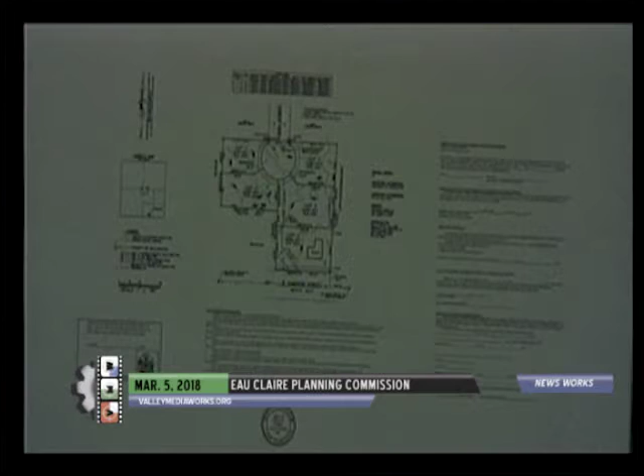The cul-de-sac bulb is off the 19th Street Addition. All lots do meet R1 district standards, which is single-family. Ryan, can you make the map a little bigger? Oh, sorry. There we go, thank you.

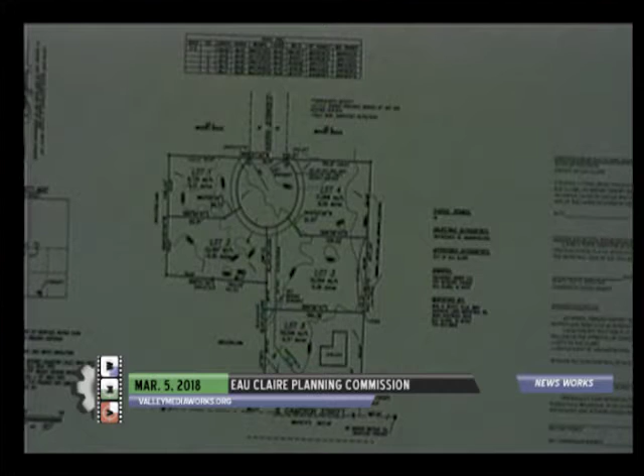Utility easements have been sent to Xcel Energy, AT&T, and Charter TV, and they must be shown on the final plat. Attached in your report is the engineering report. Staff would recommend approval of the preliminary plat for 19th Street Addition with two conditions: on the final plat, they need to indicate all the utility easements and compliance with the recommendations in the engineering report. I would be happy to answer any questions.

Are there any questions for Ryan? I don't see any at this point. Is the applicant here? Would they like to come forward? I don't see the applicant. This is a public hearing. Is there anyone else who'd like to speak to this issue? Seeing none, we'll close the public hearing, and I'd be looking for a motion.

I move approval with staff recommendations. Second. We have a motion and a second. Any discussion? Seeing none, we'll call the question. All those in favor? Aye. Any opposed? Motion carries. Second item on the agenda.

That might be a record, 2 minutes. For approval: site plan, Azura two 20-unit assisted living memory care facility, and a CSM for 3 lots.

This project got the rezoning and the general development plan approved last year. It's on Bullis Farm Road, located about here. With this project too, you are approving the certified survey map, which creates 3 lots: a common access drive, lot 1 with a building on it, lot 2 with a building on it, and a future phase for additional building.

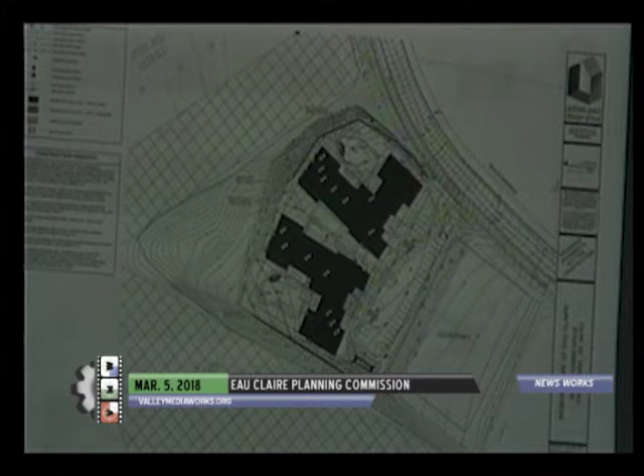Here is the site plan showing the two 20-unit buildings with shared parking. Here's the elevation showing the 1-story buildings. And then also the landscape plan.

Again, this facility is two 20-unit assisted living memory care facilities, with approval of a site CSM for the project off of Bullis Farm Road. Attached in your packet is the site plan, building elevations, CSM, and narrative for the project.

The site plan does create 2 20-unit facilities, which is consistent with the general development plan approved by council last year with the rezoning. The CSM does create 3 lots. City code does require all lots have frontage and access to a public street. Lot 2 of this proposed CSM does not have frontage, and thus the Plan Commission must approve the certified survey map.

The development does propose 1 single access drive to Bullis Farm Road. With the certified survey map, it does have a 66-foot wide access, parking, and utility easement. Lot 3, right here, will have to have a final site plan approved by the Plan Commission at a later date.

The site plan shows a 32-stall parking lot in front of the buildings. Typically, the residents at this facility do not drive. The required parking for this facility is based on the number of employees and visitors' needs. With the narrative, the applicant states there will be 17 total employees servicing both buildings, thus leaving 15 stalls for customers, visitors, or deliveries.

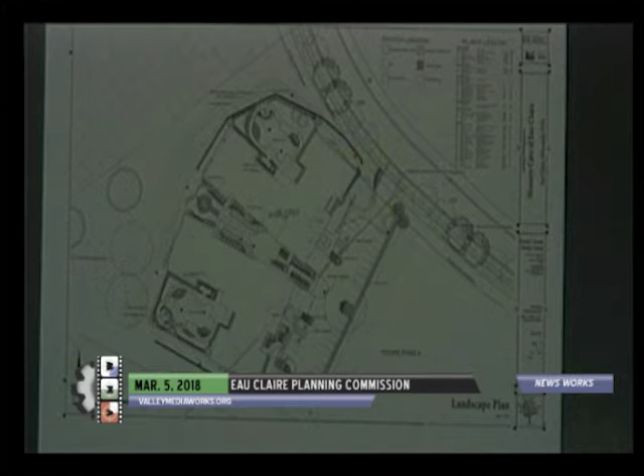In your packet is the engineering report. If the Plan Commission does find this site plan consistent with the general development plan, it should approve it with some conditions: providing a pedestrian link to Bullis Farm Road, city surveyor review of the CSM, and with Plan Commission approval of the site plan, also approving the 3-lot CSM, with Lot 2 having access, parking, and utility easements. City engineer approval of grading and drainage, and establishing a maintenance agreement for the stormwater facilities. I'd be happy to answer any questions.

Are there any questions for Ryan?

For Lot 3, which we don't have a site plan for, I'm assuming they would have to add additional parking. Correct, depending on the parking need of that facility. Okay, because that unit is supposed to be a larger number of units, right? So it would have a greater parking requirement. That is correct.

Okay, thank you. Any other questions for Ryan? I don't see any, thank you. Is the applicant here?

Good evening. My name is Matt Lyons, 1233 North Mayfair Road, Milwaukee, Wisconsin. I'm here to answer any questions. I don't have a prepared statement.

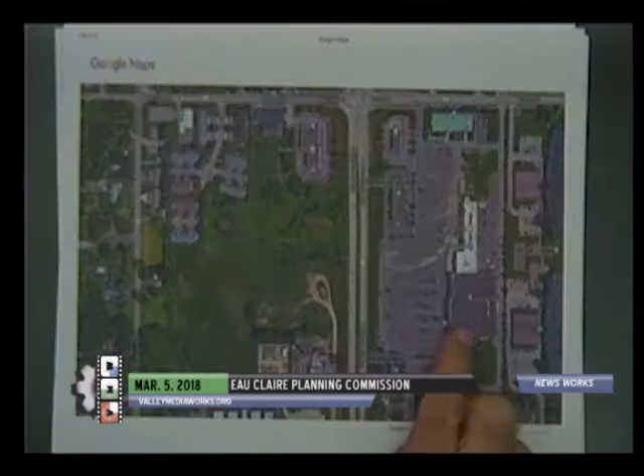Again, this is Hope Gospel that got approval of their rezoning and conditional use permit last year. The site is south of Dunkin' Donuts, across west of the new Festival Foods off of Clairemont Avenue.

Here's the proposed building with driveway. That is a private driveway as proposed. Here's the one-story elevation for the facility, and then the landscape plan that's in your packet.

Hope Gospel Mission and Everyday Surveying and Engineering are requesting a site plan approval for the men's shelter. Attached in your packet is the site plan, building elevations, floor plan, and narrative for the project. The site plan shows a 23,740 square foot building. The narrative in your packet explains the increase in square footage for the building from the approved general development plan, including a larger office facility, a larger lunchroom, and one additional bedroom with 2 beds.

City code does allow for a 5% increase in the number of dwelling units within a project that does not need to go back to public hearing. Staff believes, and Mr. Darryl Tufte believes, that the additional square footage of the project only increased it by 1 dwelling unit, which is consistent with the general development plan approved by City Council.

The site plan shows a 57-stall parking lot for the building. Most residents at this facility typically do not have cars, so the required parking would be based on the number of employees and visitor parking need. The applicant states in their narrative that 15 or so staff members will be working at the facility on a given day. However, during a large meal or large meeting, the parking demand is increased significantly.

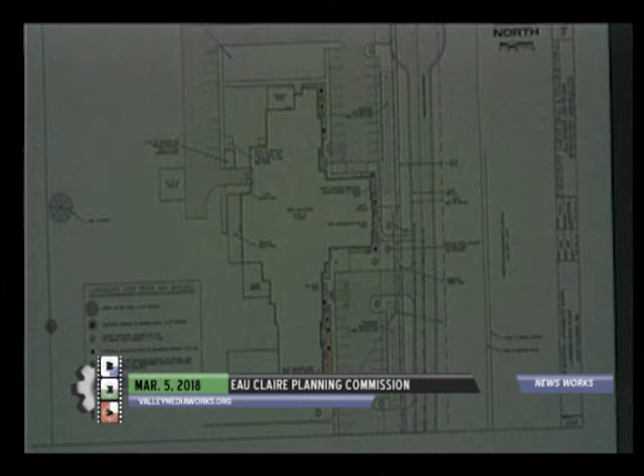Site access is from 3 24-foot wide curb cuts off a private drive on a public right-of-way, shown here. Sidewalks are shown from the front of the building and on the side, however they need to be linked to the street. The landscape plan does note a mixture of foundation plantings and street trees. An 8-stall U-shaped bicycle rack is shown and provided.

The site plan notes the removal of the existing non-conforming billboard, which is required by city code. The future additions noted on the site plan will need to be reviewed by the Plan Commission. Exterior lighting and dumpster enclosure are noted to meet city requirements. In your packet is the engineering report. If the Plan Commission does believe this is consistent with the general development plan, there's a couple conditions that need to be met.

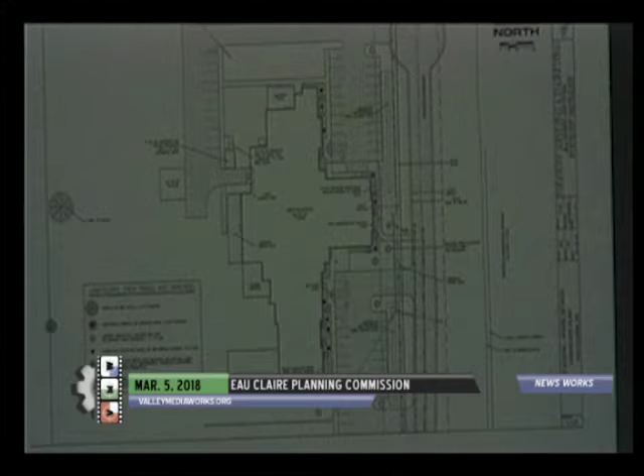The pedestrian link from the building to the street must be completed. With this approval, the existing non-conforming billboard will be removed prior to the issue of a building permit. And then also the city engineer approval of the grading and drainage. I'll be happy to answer any questions.

Are there any questions for Ryan? Commissioner Peterson: What happens if there's access needed north of here from the south access to Highway 12? I think I would turn that over to the city engineer.

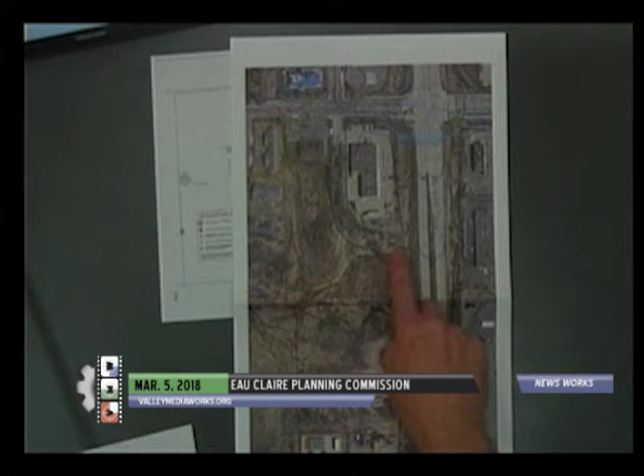We don't know quite yet what's going to happen with this site up here. There's a little bench of a spot that's really not developable with the setbacks for the right-of-way. So when this happens and they deal with where this drainageway comes through, then we'll look at what this site is, what this road is, and whether we really want that road to come through. You can see how close this intersection is, just off here, but that road's coming through. This intersection's really close and that intersection's really close.

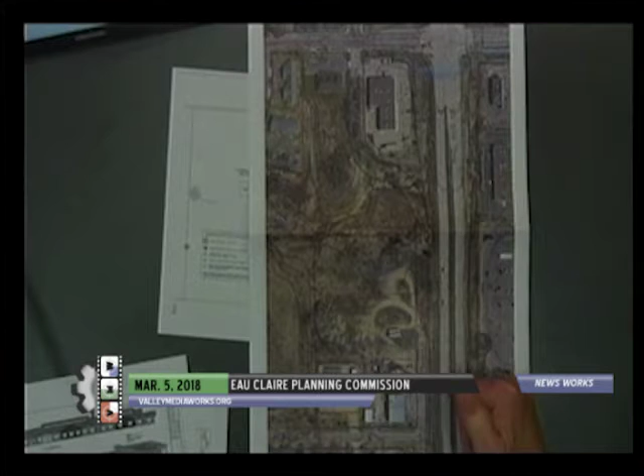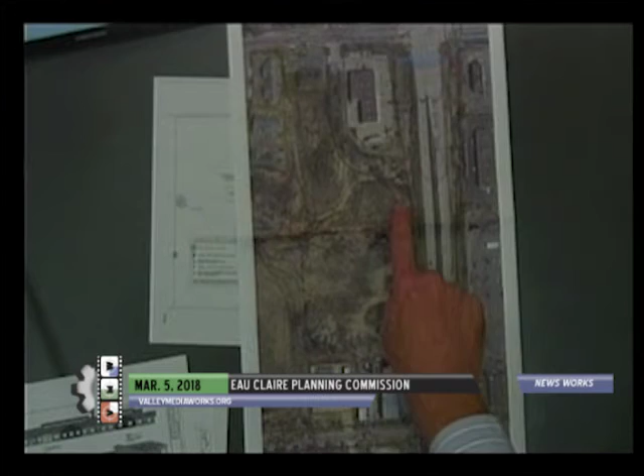We'll want to look at the traffic patterns to know whether that road really should go through or not. Since they're putting a private drive on public right-of-way, can that be converted to a public street if needed? Yes, and in fact, on the next Plan Commission or next City Council meeting, there's the development agreement for this project. The original development agreement, when this parcel was split off, talked about when this road would be built. Now we're going to amend that agreement to include this parcel, and it has provisions that they will be signing a petition and waiver for the construction of this road when and if it happens. That was my concern, all being discussed. Thank you, John.

Are there any other questions for Ryan? Commissioner Grandland: With the stipulation that they extend the sidewalk and construct a private drive on the public right-of-way, where exactly do they quit making their sidewalk? Is it just when they cross the property line?

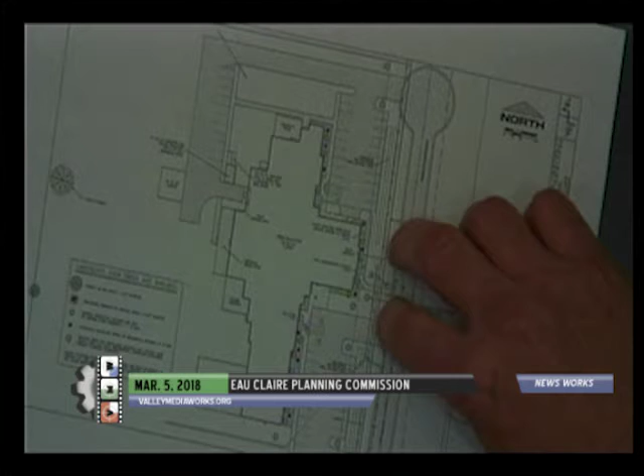Ryan, if you don't mind, I'll answer that one. The way we've set up the development agreement, because of the right-of-way and sidewalk requirements, there is a requirement for a sidewalk to be constructed along the right-of-way when the permanent road gets built. But the development agreement also stipulates that prior to that, as part of this site plan, they construct a pedestrian access from their main door to what would be the southeast corner of their site. That at least gets the pedestrians down to here, and then when the permanent road gets built, there'll be a permanent sidewalk along the whole street.

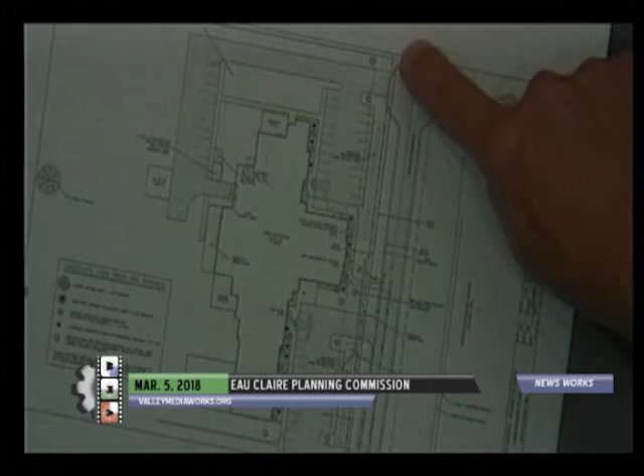Ryan wasn't involved in the discussions of the development agreement, so that's why I jumped in. Thanks, Don. Are there any other questions for staff? I don't see any at this point, thank you. Is the applicant here? Yes, Dan Knowlton from the engineering firm Everyday Surveying and Engineering, so I can answer questions. Are there any questions for the applicant? I don't see any.

Okay, this is a public hearing. Is there anyone who'd like to speak to this issue? Seeing none, we'll close the public hearing, and I'd be looking for a motion.

Commissioner Peterson: I'll make a motion to approve with the conditions in the letter. Do we have a second? Second. We have a motion and a second. Is there any discussion? Seeing none, we'll call the question. All those in favor? Aye. Any opposed? Motion carries. All right, now on to things for discussion and direction: Town of Union Draft Comprehensive Plan Update.

The Town of Union is updating their comprehensive plan, which was prepared in 2007. This plan would cover the period from 2019 through 2038, a 20-year time span versus most of our comp plans, which typically have been a 10-year time frame. We've been asked to comment on this since we have extraterritorial review in a portion of the Town of Union, and that's why we're bringing it to the Plan Commission. The update is actually being prepared by the Eau Claire County planning staff, which is good, rather than an outside consultant.

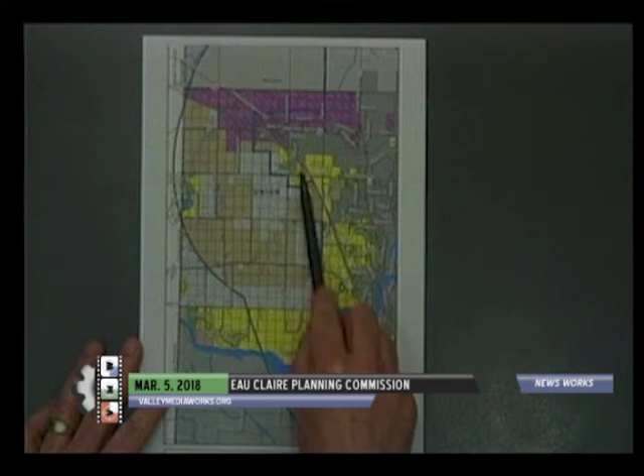The agreement with the Town of Union essentially distinguishes whether land is within the sewer service area or outside it but within the 3 mile area. We have different standards for lot size depending on that. Within the sewer service area, the intent is that over time the city would be annexing into those areas, whereas we would not be annexing outside that boundary.

But outside the sewer service boundary, within the 3 mile area, we still want plat review authority. All the documents in the comprehensive plan they're preparing include that agreement, which we adopted in 2010 and amended in 2014, and they include this map, consistent with what we have right now.

The addendum I referred to dealt with the commercial area up here, clarifying how the land would be divided whether within or outside the sewer service area, which wasn't clear in the original agreement. An additional condition was attached giving the city the right to review site plans for any large big box type retail development that could occur there.

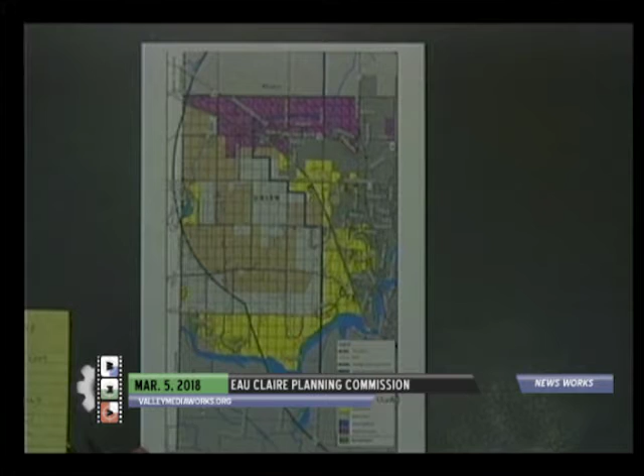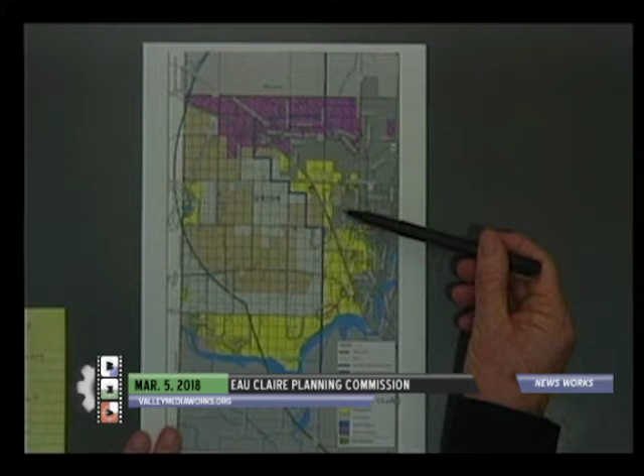There are 2 changes to this map compared to 2010 and 2012. They don't affect any residential or commercial land, only 2 parcels. One was listed as a public designation but is actually part of Sherman Creek Park, so they're changing it to a park designation. Another was designated public institutional, and they're changing it to park. That parcel is actually outside our 3 mile area anyway, so it doesn't have any bearing.

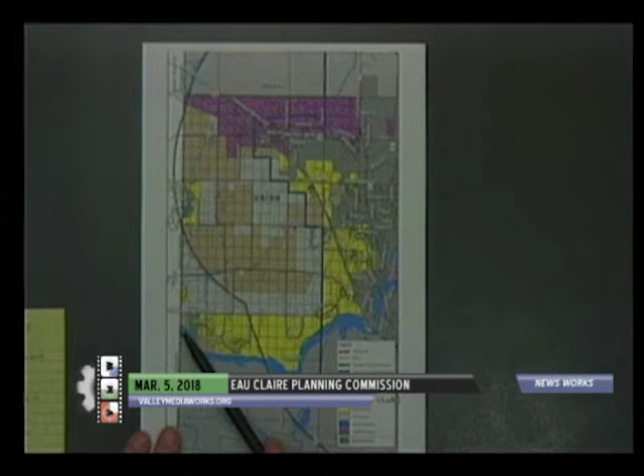So with that, if you have any questions. Are there any questions for Pat?

Commissioner Mitchell: Thank you. I think the letter's fine, the comments are fine. I had a question on page 47 or 150 - I guess 150 would be on the hard copy, 47 on my screen.

What page again, Kathy? Page 150. It's under the intergovernmental cooperation goal, the first under goals, policies, and objectives. Well, I could just read it - I don't know if you have the same numbering. Okay, number 5 on there.

Participate in discussions on the potential expansion of wastewater or water to unincorporated areas. Does that not violate the policies and principles of our comprehensive plan? That is, the extension of sewer and water to property that is not annexed to the city? I mean, it doesn't say they want to do it, but they want to talk about it.